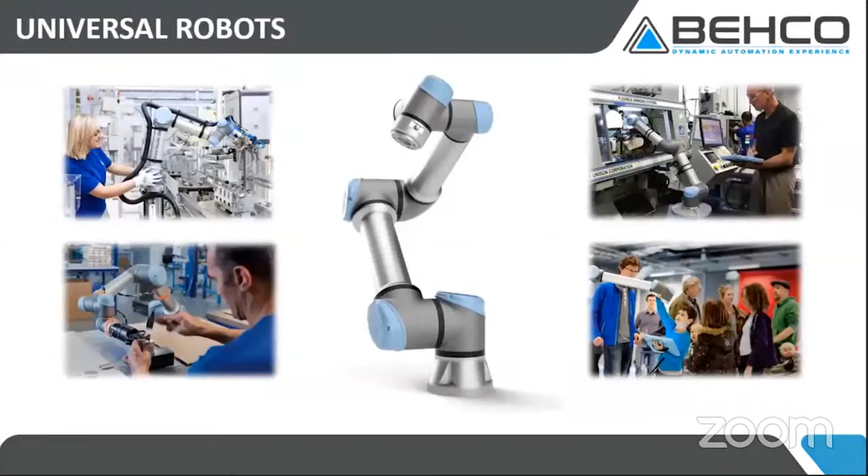We've been a Universal Robots distributor since day one in 2013. To our good fortune, we work with the best collaborative robot in the world. We've seen this emerge from the start as a tool that enables our customers and users to be able to take hold of a robust 6-axis tool and learn how to teach it simply to do tasks that are important to their business. That's why this has been so successful in the market.

In order to solve problems for customers, we have aligned ourselves with a fantastic group of technology providers to the market, whether it's software products, 3D vision, mounting, dressing, end-of-arm tooling, vision products. We can handle soup to nuts activity for a customer looking to do pick and place or machine tending activity, providing support around programming if necessary to get you started.

I just want to talk again a little bit about the product that is coming to market. The checksum utility is going to be loaded into your UR robot as a URCap and then configured to allow for a safety PLC to query the robot and verify its safety setting. We think this is important because it's a standard feature in the industrial robot space, and it allows the risk assessment that in many cases has specific safety settings to be protected from unintended consequences from a poorly managed change.

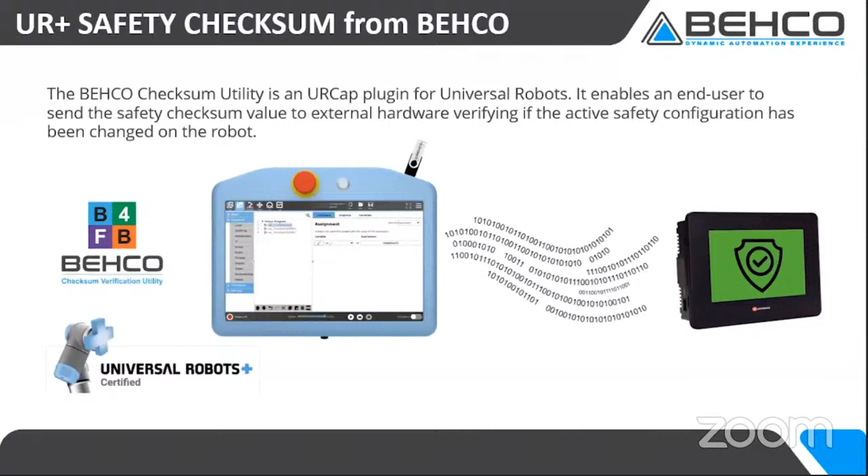This would sit on top of the robot software and ask the robot to verify that it has the correct safety setting. So to that end, we'll make sure that Roman will go into deep detail on how that's working for you. But we're very excited to be able now to present ourselves as a UR ecosystem.

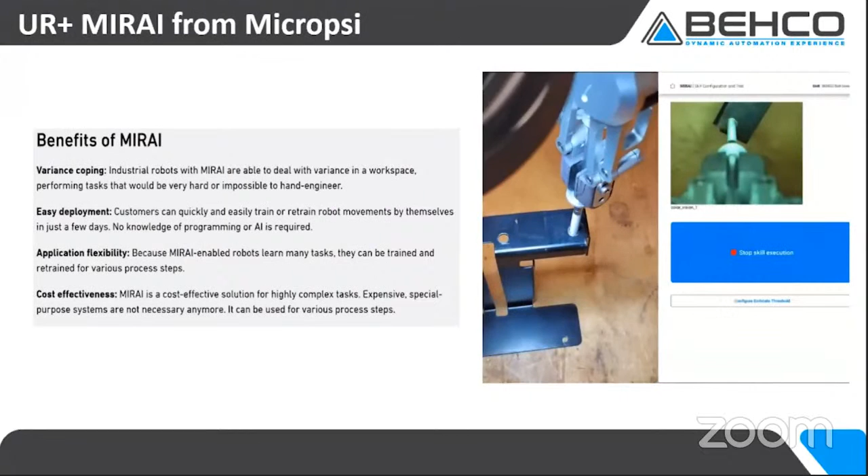The Mirai system is going to, I think, show what the future looks like in the robotic application space. Using the vision system tied with a force torque sensor, we're able to teach this system tasks which it's then able to accomplish regardless of the fixturing of the part. It will find the location. So giving it hand-eye coordination and adapting to the real-world challenges of manufacturing tolerance, we see this as a breakthrough technology to study and see where it can take us.

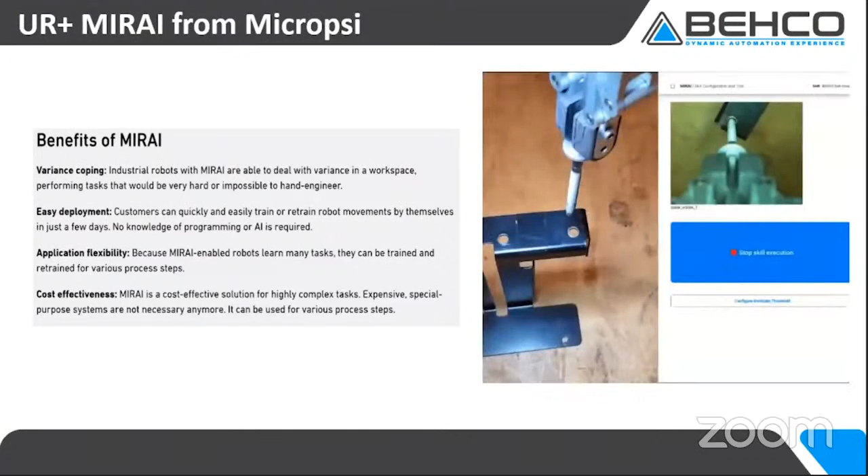We think this is a great alternative to the scanners that are being used, especially in any high traffic areas. And certainly with a light touch that Caleb will show later, you can see yourself working next to the robot and not feeling the same level of concern with even a force limited stop.

And then last of our technologies is the Canon 3D bin picking. This has been presented at previous tech takeovers. I think what's important to show here is that there are different sizes based on different parts. We're seeing this emerge again as a leading technology for companies that are looking for an enterprise solution. It can handle a vast variety of part conditions, and with the different options, it can overcome obstacles that would traditionally make the technology not usable.

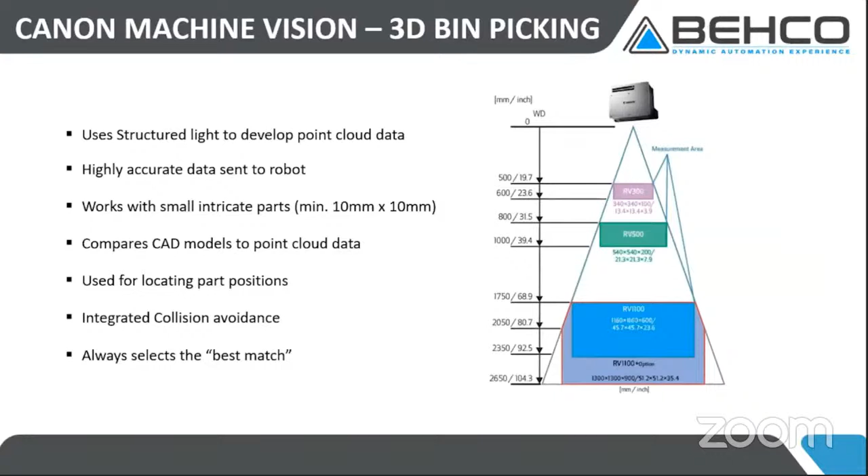So to that end, we're excited to show this demo now where we can do work for you and feasibility studies to prove out whether you've got the right parts for this technology.

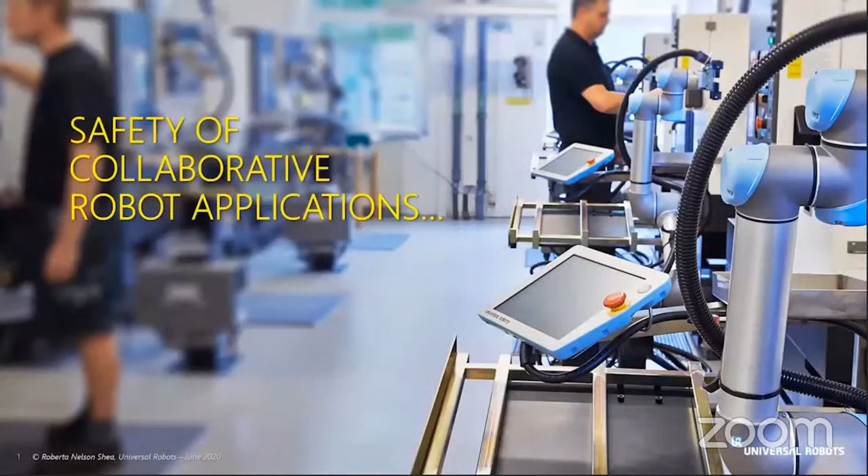Well, welcome everyone. I'm here to talk a bit about safety in robots because that's what I do. You'll get to all the exciting features that will be shown by the other speakers as far as how to make use of the robot, but I talk about how to make use of our robots and ensure safety of personnel.

So just what is a collaborative robot? And this is sometimes called a cobot. After all, Universal Robots likes to say, we are cobots. We started it. We're the leaders in the world, and that is obviously a talking point of great pride.

But really this term started at, if you can believe it, a boring safety standards meeting in which we were talking about risk. And philosophically, the discussion came to, well, if a robot were to contact a person and the person is not hurt, why not allow the contact? But what we all have to understand is that this is not simply about the robot, it's about the application. So what we're talking about is an application where purposely designed robot systems work in direct cooperation with a human in a defined workspace.

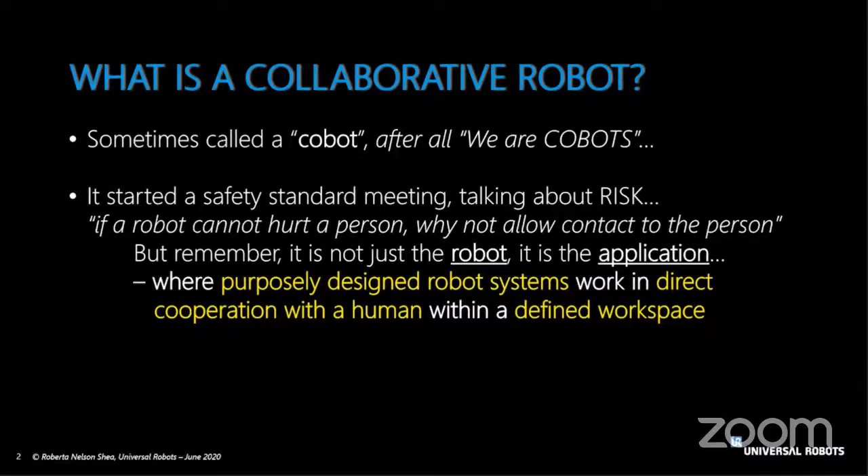So collaborative robotics is not, I bought a collaborative robot that's safe, I don't have to do anything. I don't have to worry about risk assessment, guards, safety fences, cageless robots, yay, whippy. But that is wrong. That is a mistaken idea. The issue about safety is safety of the robot application.

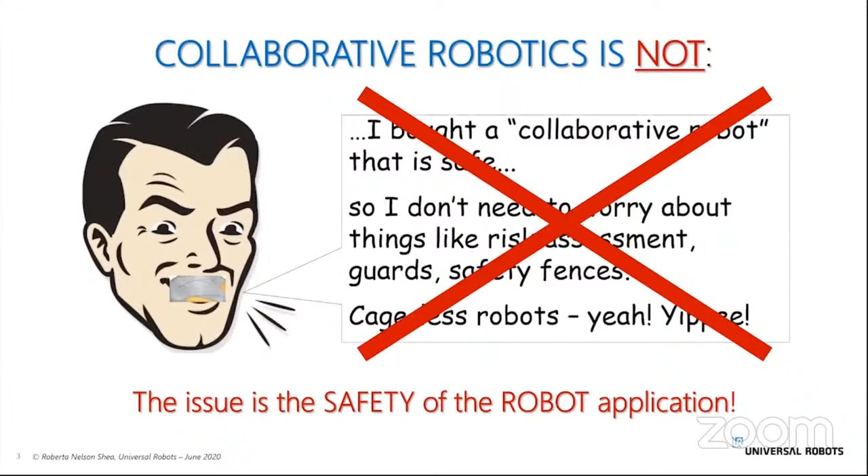So collaborative robots, officially from a standards viewpoint, there is no such thing as a collaborative robot or a cobot. Now I'm saying that simply from a safety standpoint and safety standardization. But we still have all sorts of statistics and PR about collaborative robots and cobots. And if you think it's not an official term, but there's statistics, well, I guess that tells you the magic of marketing. So these terms really are marketing terms. They're not what's talked about in a standard.

But what is talked about in a standard and what's talked about as far as expectations are that a cobot is a robot designed to be able to work side by side with a person, meaning be usable in collaborative applications. That it's easy to use, easy to deploy, easy to get a very quick ROI, and to hopefully open up opportunities for productivity that did not exist previously.

So what we get involved in is more or less automating the dull and dirty. The payloads of our robots go up to just under 20 kilos. And so we're not talking about the 1,000, 2,000 kilo robots lifting and moving whole car bodies. We're talking about smaller robots and applications that more often than not, the application is dirty. It could be dull. It could also be quite lacking in ergonomics. And so therefore there's ergonomic hazard. So this is a good thing.

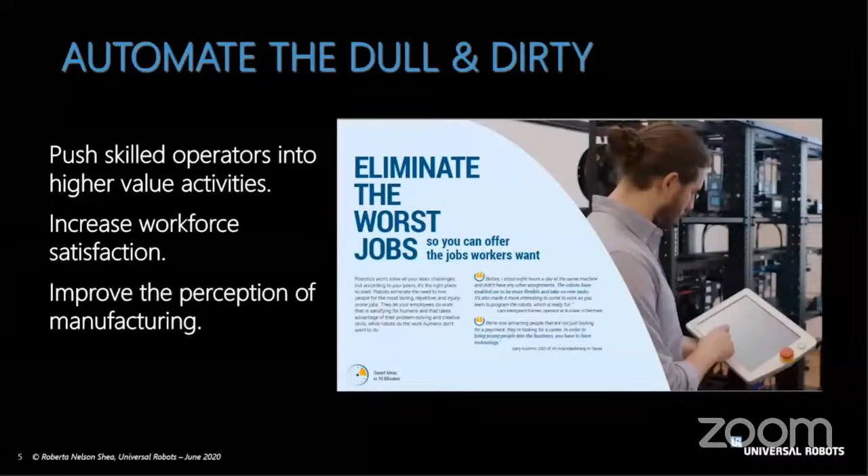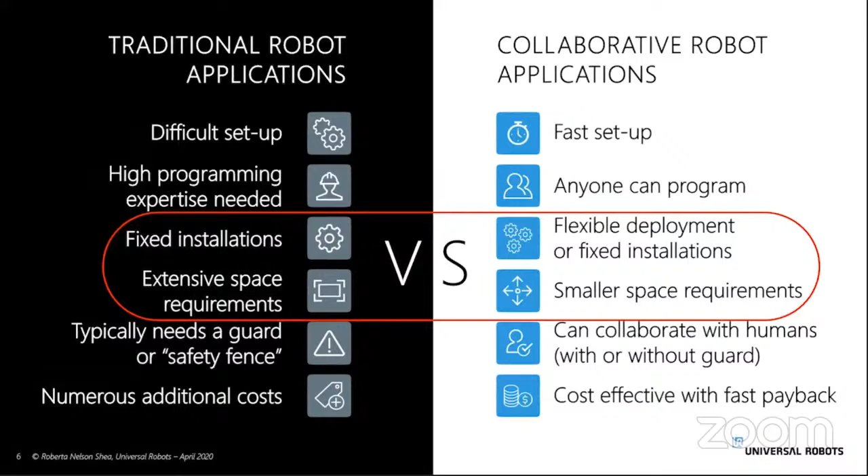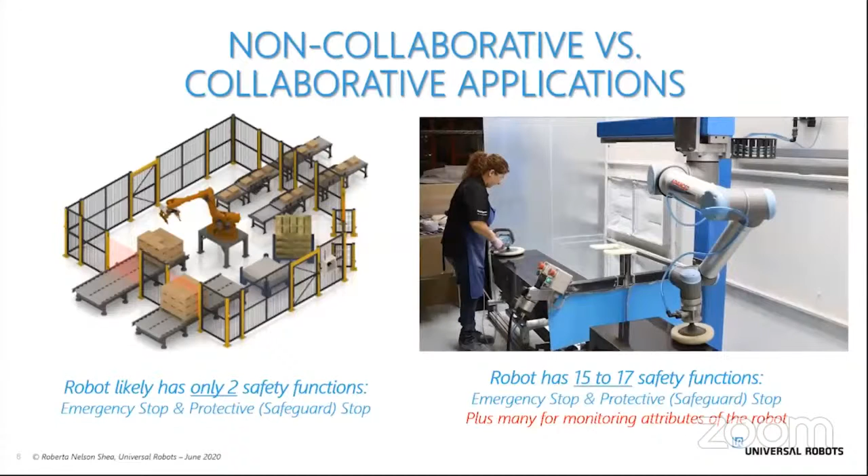So those are some of the rather typical things to point out as being differences. Okay, for that non-collaborative application where we separated, the thing that everybody has to understand is that there is a concept called restricted space, and that's the space that the robot application operates within and cannot escape from. I know that sounds like a funny thing to say, but you can program a robot to many, many different motions, and unless the movement is restricted, it goes exactly as far as it can.

So one of the first things people are advised to do is, once you know your application, limit the space that the robot can operate within, because that makes your job simpler for trying to make your application safe. So in these traditional applications, we kept everybody separated and people away. So again, this whole concept of the robot operates in one area and people operate in another. Well, we don't have that when we talk about collaboration.

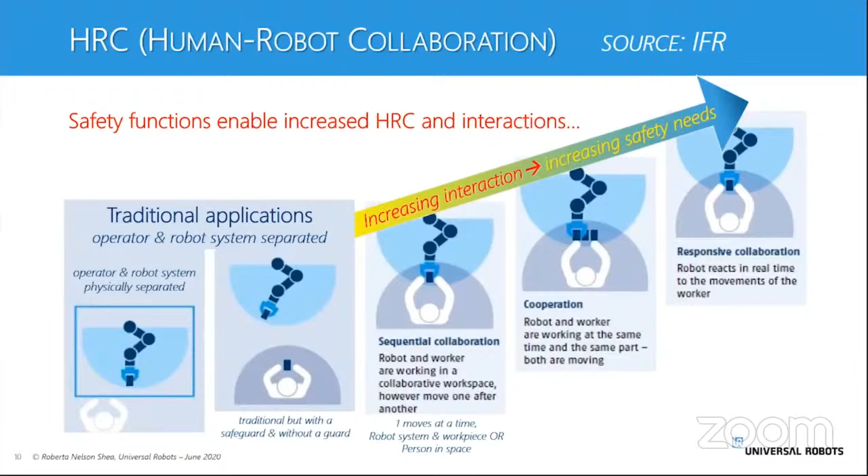And then we really are still in the same situation in the box immediately to its right, which would be what we see quite often with light curtains or safety scanners. And then once we remove these safeguarding means that separate people, we have interaction, whether or not it's one at a time, same time, or highly interactive. Those are really all about the same thing. It's just how do you provide for safety? So how do we do that? We do that by safety functions that get described in safety standards, and they're described within the user manuals and the literature provided by robot manufacturers.

So the standards part of all this, that's really what I love, because that's the part that I find to be the most fascinating. And yes, I know that's probably a bit strange, but that's me.

Okay, we have lots of safety standards, but fortunately in the world of robots, we have a very wonderful global situation in which the international standard is based off of the US's national standard, and the international standard has, over a period of time, marched forward. It has been adopted in Europe. It's an EN ISO standard and harmonized under the Machinery Directive. We also took that ISO standard and adopted it as the current revision of ANSI RIA R15.06. There's no deviations, no changes from the international. Canada has done the same. Canada does have a couple of very minor deviations.

And as well, Japan, Korea, Australia, and more countries have adopted the ISO standards as their national standards, either directly keeping the same nomenclature, meaning saying it's ISO 10218-1 or -2, or under their own name, like what the US did with the ANSI RIA R15.06, but that's a wrapper around the international. So we have this wonderful situation of the same standard really required around the world. I'm not aware of another machine that is used around the world having this wonderful distinction.

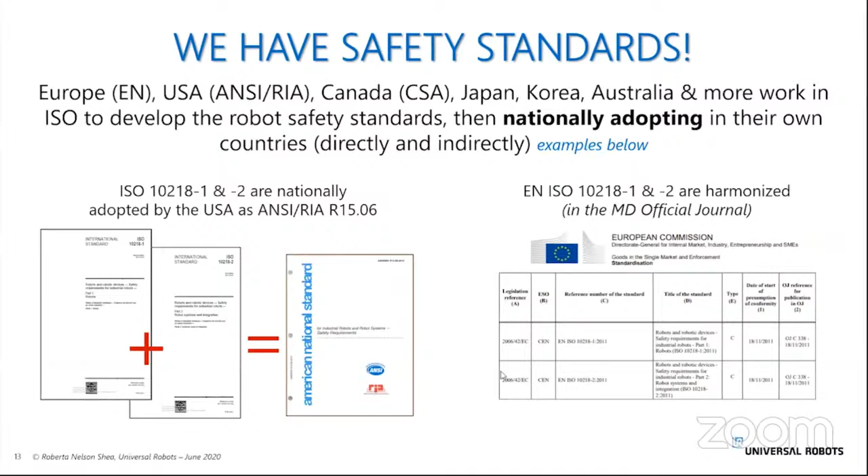So how can you be sure that whatever you're getting is safe? Meaning you buy a robot and you say, how do I know that it actually meets the standard? Generally speaking, robot manufacturers do seek third-party certification. It is not a requirement to have third-party certification of robots, but most robot manufacturers do so because that is a way to provide, if you want to say, that safety net or comfort to the marketplace of, I say we do what we're supposed to do. I say we comply, but here an independent agency has reviewed everything and they say we comply.

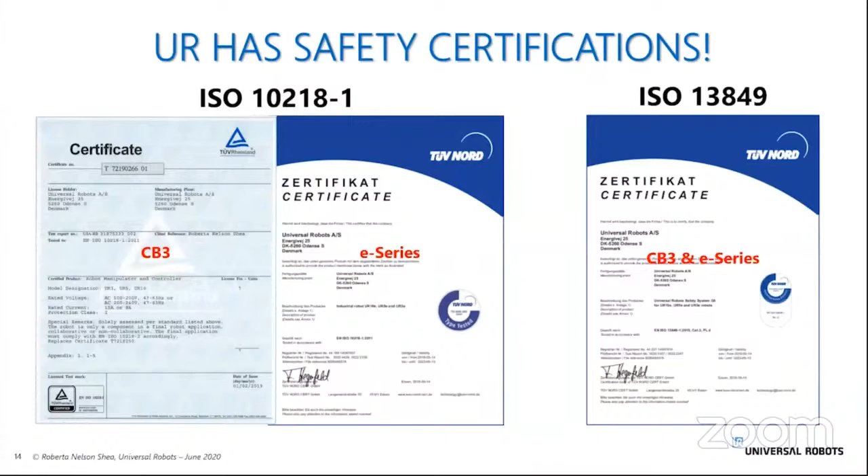So that is also the case with Universal Robots products for both our CB3 series and our E series robots. So we provide a lot of functional safety information. And I can tell you that I have yet to see any other manufacturer provide as complete information and as useful information. Because keep in mind, our robots then get paired with an end effector. We don't know which one. They can be used with many. We don't know exactly what the application is. You're going to see examples of various applications shown today, but there's many more. And they're used for picking and placing, assembly, inspection, sealants, welding, all sorts of things.

So that integrator who puts it together into the application, whether it's a third party, whether it's your distributor, whether it is the end user themselves, that third party has to make it all work. We make sure we provide the information you need in order to enable an application to be put together and comply with safety requirements.

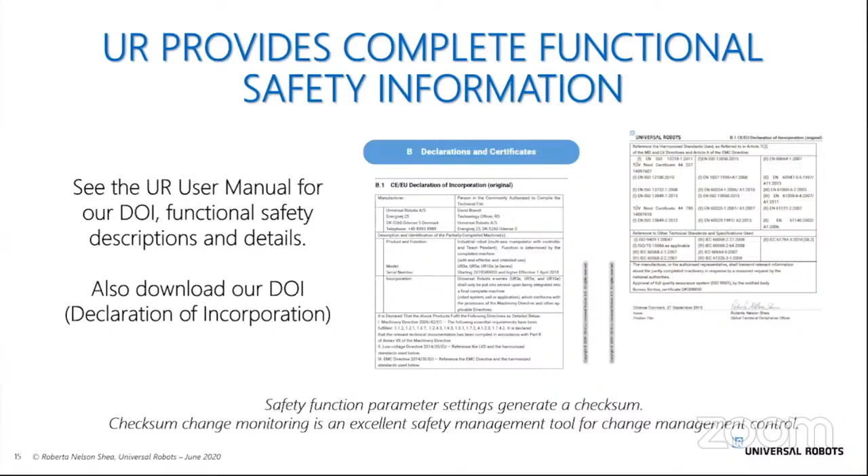So we do provide a declaration of incorporation. That is something required for Europe, but it has the unique benefit of detailing in a summary form just what does the product comply with and how are you assured that it is complying with things. In addition to that, there's a complete table of safety functions and descriptions of how they work, triggering events, outcomes, dependencies, and so forth. So you get it all, as well as our PFHd values and everything else.

It's important to understand safety function parameter settings, because for almost all the safety functions, you have a parameter that can be set. Let's say it's an axis limit or a joint limit or a joint speed. Let's say it's speed of the TCP. Let's say it's power or a force setting. And each of these are parameter settings for your particular application. And those settings generate a checksum.

And you're going to hear today about a utility at a remote computer, if you like, that can be monitoring the checksum and monitor whether or not it has remained the same as what's in the library as having been the proper checksum, or if it's been changed. If it's been changed, there's been a change to the robot safety settings. This may be perfectly valid and it just wasn't properly documented, or this could be an unauthorized change. So this is a great tool to have for safety management and change management control.

So which part of these ISO standards applies to me? And I'm saying me, trying to put my hat on for each and every person in the audience. If you're a robot manufacturer, part 1 applies to you. If you are an integrator or end user, part 2 applies to you, because part 1 is about the robot itself. Part 2 is about the robot system and the robot application. And it talks about putting everything together in the requirements.

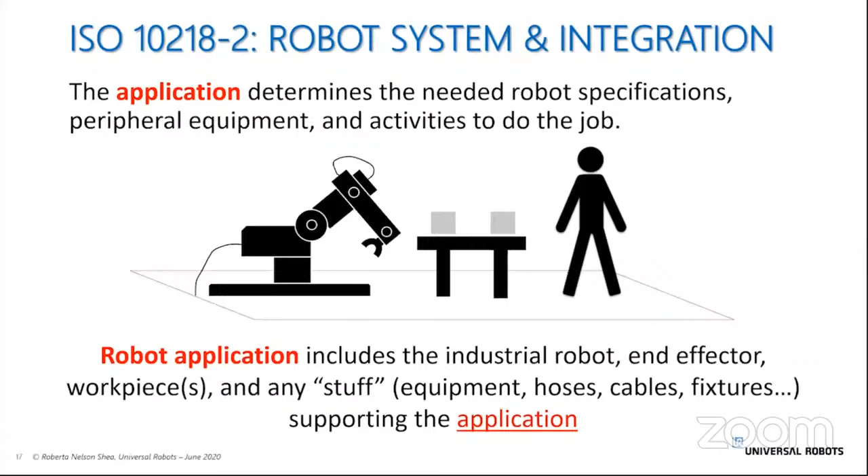Well, in addition to those 2 robot safety standards, 1 for the robot manufacturer and 2 for the integrator, there is also something called ISO TS 15066, and that means ISO technical specification. Now, a technical specification is not quite the same as a standard. If you want to think about it in the order of priority or importance, a standard is number 1. Technical specification is number 2. A technical report is number 3. A white paper number 4.

And as you go up the chain towards a standard, you are going up the chain towards having a better grasp on what are the issues. So the notion of collaborative robots, collaborative applications was quite new when it came out in the 2011 safety standard. So this technical specification was written to try to provide some more guidance and shape around how to do it.

So the technical specification means that it includes requirements. It can make normative requirements, but it cannot disagree with the standard that it supports. So this particular technical specification gets used along with part 1 and part 2. As just an FYI, this particular technical specification was adopted as a RIA, Robotic Industries Association technical report, and I have it listed here. So while it's a technical report in the US, it is a technical specification internationally.

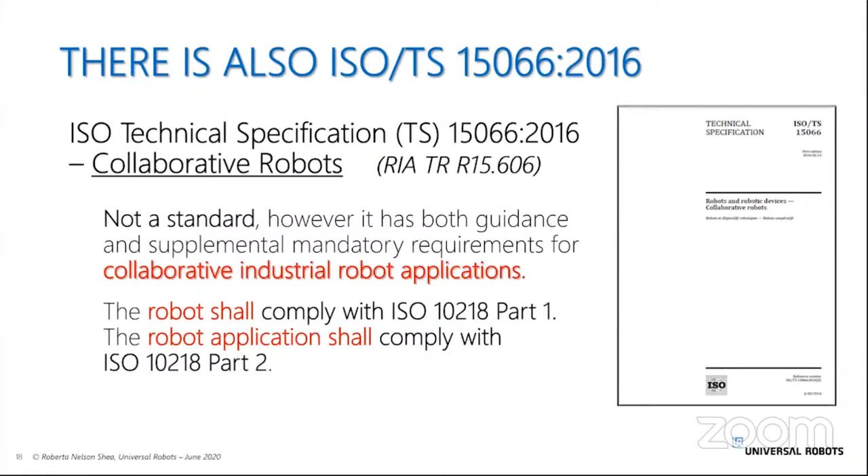The reason it is not a technical specification in the US is that ANSI has no allowance for this sort of document. It's either a standard or a technical report, hence it being a technical report. Right now, all of 10218 is under revision. It's not going to be out for a couple of years, but part of the revision is to incorporate the materials that are in 15066 directly into the Part 1 and Part 2 documents.

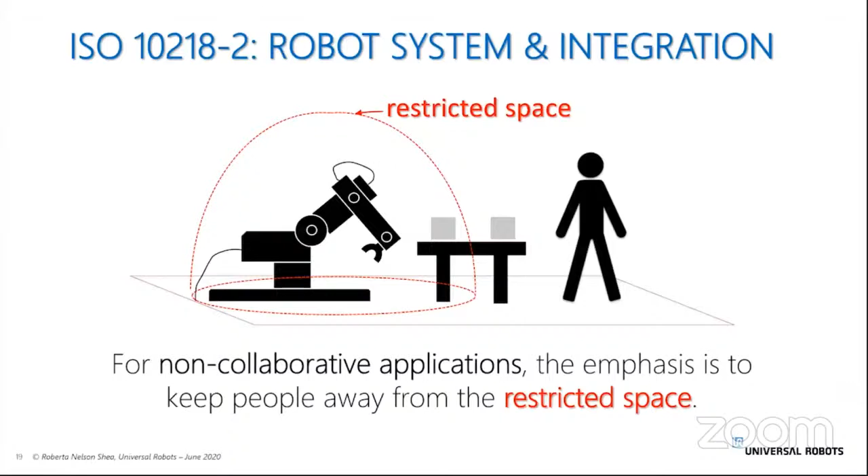Okay, I mentioned the restricted space. So in non-collaborative application, the emphasis is to keep people away from the restricted space. But we don't do that with a collaborative application. Instead, we have to ask the question, how do we protect workers? Well, we have to follow the standards, the technical specification, technical reports, and there are technical reports that are specific to robot applications. So what's the challenge of doing this? And it's going to sound maybe a little flippant, but the challenge is reading and comprehension. And all I've got to say is don't give up.

First thing you want to remember is if you are planning to get a better understanding of a standard, read it cover to cover. Do not whip out the highlighter at the first page and pick things to highlight. That is not the intent. The standard is cohesive and it self-references within itself as well as to other documents. The most important thing is to understand the scope of the standard, what it's intending to cover, and what it does cover, and then to read it cover to cover. Give yourself a little soak time, then go back.

A standard is not to be used where you do a word search and only look up the word you're interested in, because you will lose meaning and you will lose a fullness of understanding. So it's reading and comprehension. So just don't give up. That's all I ask. It does take a little bit, but you can get beyond it. And I can tell you personally, I've had some standards that I've really been challenged to read and even like initially. I had one, I kept printing it and start reading it and I'd throw it out. And I would probably do that about once a month. It took me a year to get through it. So it is possible.

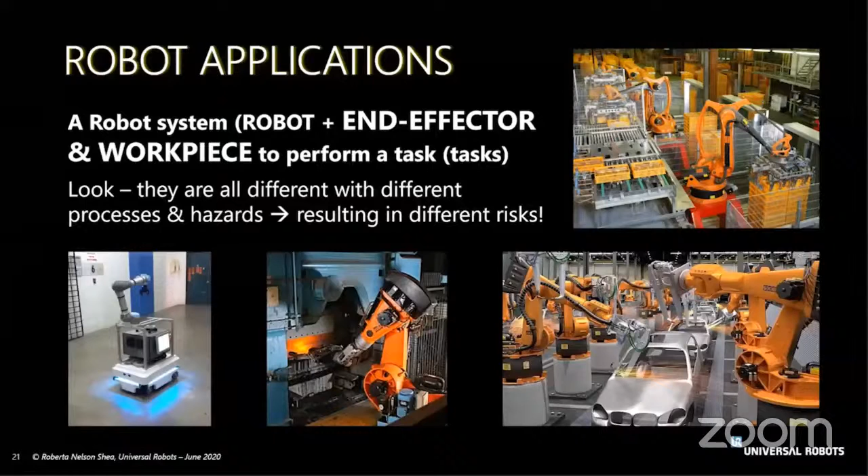Are there thermal risks? Are there any sort of laser or welding risks? All of this means that the risks are different, the risk assessment will be different. So because it is about the application, the questions that have to be asked when doing a risk assessment are: can the robot injure a worker? Can the end effector injure a worker? More often than not, the end effector and/or the workpiece is the most dangerous part about that application, and not so much the robot.

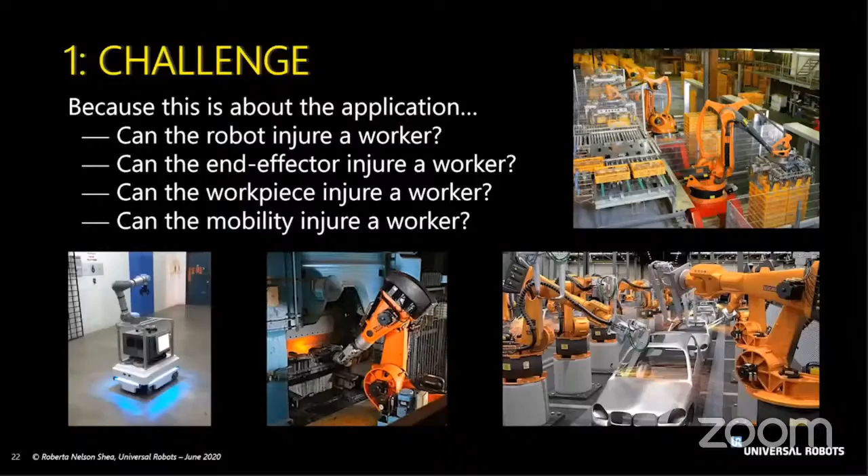Can mobility injure the worker? In the case in the very bottom left, as it's whipping around through the facility, is mobility the greatest risk? And if so, what are you doing to protect people from those risks? That could be as simple as safeguarding devices that will slow down that mobile platform, for example. So risks can be obvious, sharp edges, pointy things, but not always obvious. The risk assessment process reveals all the hazards, not just the easy to identify sharp edges and pointy things.

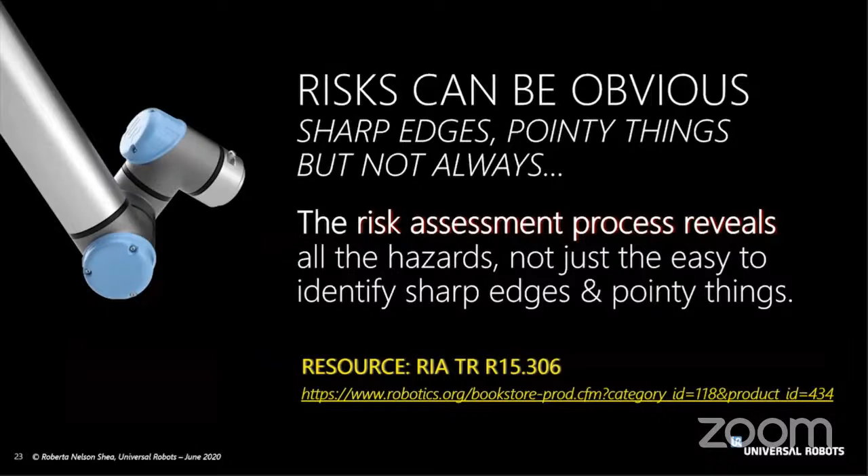And to that end, there is a resource available, and I have included the link here, from RIA, which is a risk assessment methodology. It really steps you through everything. And what I do need to point out is that risk assessment is scary if you've never done it before. Each time you do it, it becomes easier and easier, and all it takes is a few under your belt, and you say, risk assessment, I got this. I know how to do it. I feel comfortable. The most important thing is do it, be consistent, and be thorough, but don't be paralyzed about doing it or not doing it.

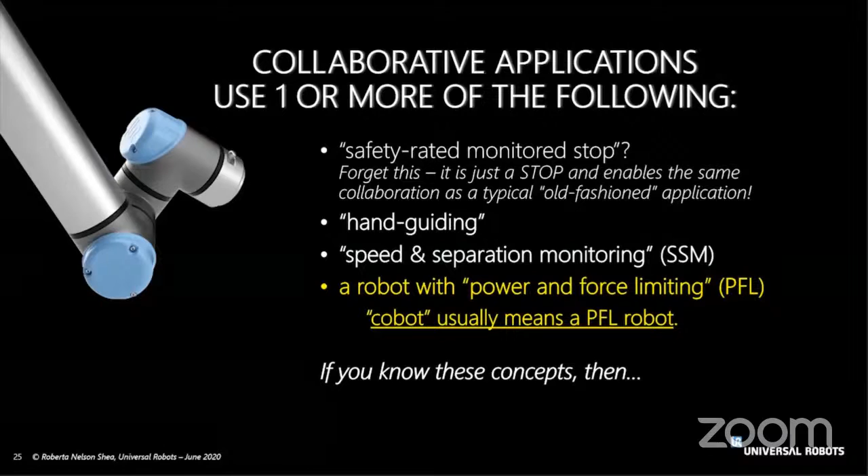So you've done your initial risk assessment. Now what? You need to design and implement your collaborative application. So we've got a few different techniques, and if you know these concepts, that's great. The world that we tend to play in, meaning as Universal Robots, is the bottom one that's in highlighted color, a robot with power and force limiting. And it tends to get used just as that for interactions, or sometimes combined with speed and separation monitoring. So remember I said it can be overwhelming to do the risk assessment, but don't be overwhelmed. The whole notion of the risk assessment, if it's a power and force limited application, is just an added step. And you can get through all this.

But let's say you're not prepared to expand your risk assessment. You don't have to do that. You can do speed and separation monitoring with our robot. If you are ready for it, there is another RIA resource for how to check to make sure you're not exceeding limits, and that's for power and force measurements. So you've got all of these things. And you also are going to have a presentation by Airskin, which would be another technique that could be used. And it could be used as a nice start to doing your collaborative applications and starting very simply.

Very good content. Thank you for queuing up some of the other technologies that we're going to present and giving us a thorough understanding of the demands for the application space, and also giving us more confidence that although the demands are real, they're manageable if we put the effort into it. So I think at this point we're ready to go to Roman.

Hello and welcome. I'm extremely proud today to show off the checksum verification utility from BEHCO. It is a utility that we developed with a Tier 1 automotive manufacturing company. Through a few development processes, we were able to communicate over all the major communication interfaces that the Universal Robots have. And it was a great learning process, and it ended up being a project that I was extremely proud to present and show off on the UR Plus website.

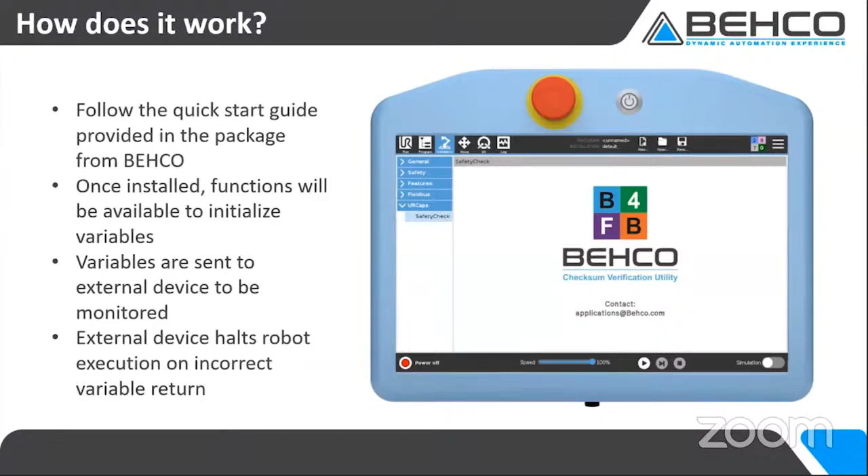And in the end, we came up with these three functions, one of which was a string variable, and the other two are integers. This allows you to communicate over Modbus, Profinet, and Ethernet IP. So in some specific instances, the PLC may not take a string variable, and that's when you'd use the other two variables and combine them together to get your checksum value.

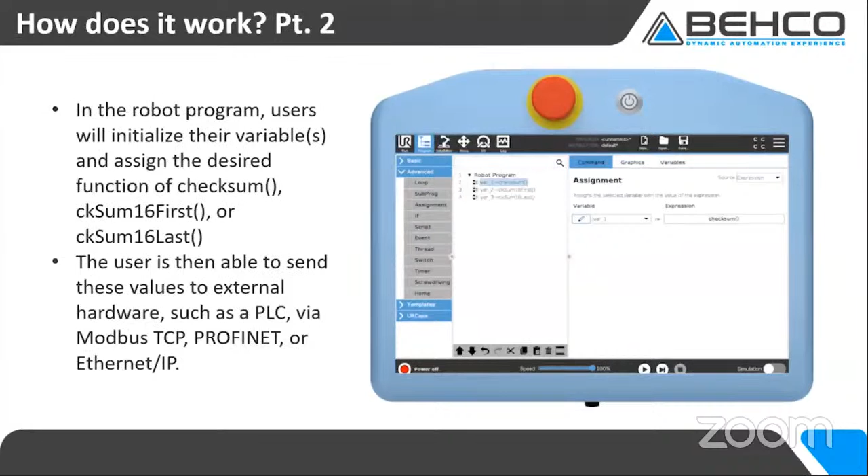BEHCO checksum verification utility, as I said, is now available on the website. And I'm extremely proud to present it, and that's really the whole gist of the utility.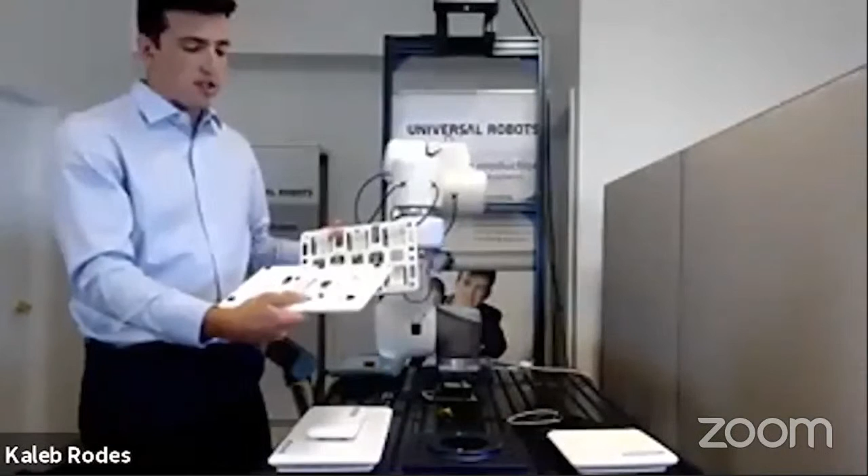The brackets on the back side here are 3D printed. They allow you to connect it to a flat surface, so aluminum extrusion or some other type of material. Then simply the pad is magnetically connected to the bracket to complete your system. The second product is what you see here on the robot, which is, again, these 3D printed brackets, but they're customized to the specific joint dimensions and the lengths of the arms to give that robot kind of an exoskeleton that wraps around the robot's profile.

The robot's products for AIRSKIN: there is Universal Robots, obviously, KUKA, Denso, Mitsubishi, Staubli. They're working on a few others like Fanuc and Yaskawa that are to come out later in the future. The installation time for this specific unit on the UR10 was about 30 minutes. Now that I've done it once or twice, I can probably do it in about 20, so you get faster as you go.

The last product here is the safety flange, which is mounted directly between your robot tool bracket and your end of arm tooling. So it's this white pad you see here, which acts just like any other of the pads. The only difference is inside of this pad is a spring. There's 3 different springs based on the amount of payload you have on the end of the robot. The first spring is between 0 and 2 kilograms. The next spring is about between 2 and 10, and then the third spring is 10 and higher. So they have different spring constants for different payloads on the robot.

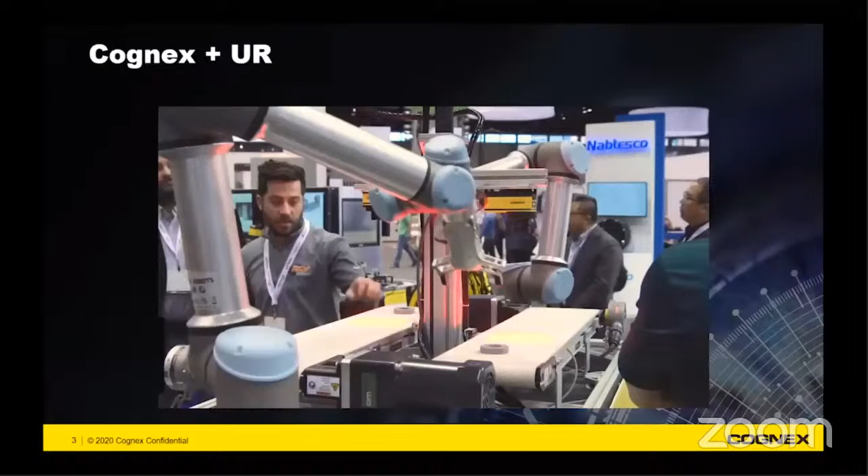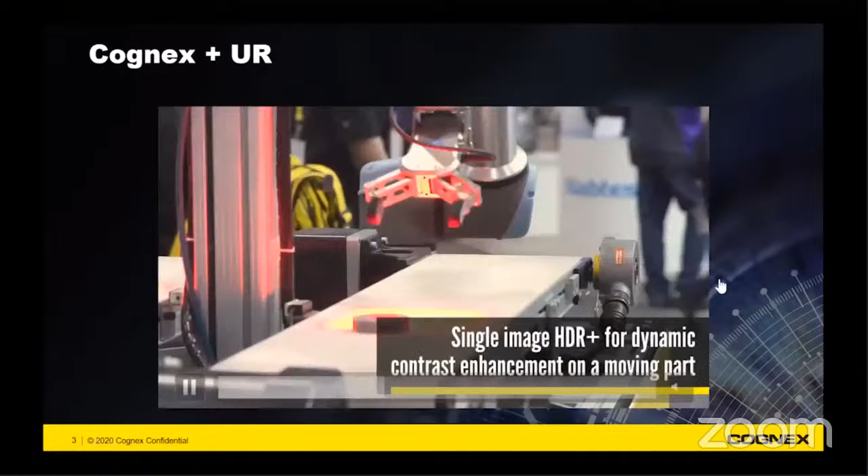About a year ago, Cognex actually developed UR caps, which essentially enabled Cognex and UR to seamlessly integrate with each other. Typically, with any robotic applications with machine vision, it's fairly difficult to communicate between the robot with the cameras and to calibrate to essentially find any parts in any type of movement applications.

Looks like the video is pausing here.

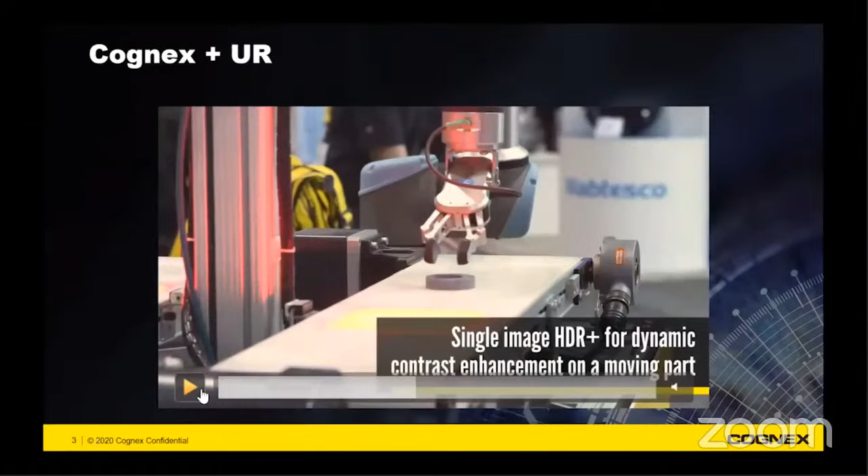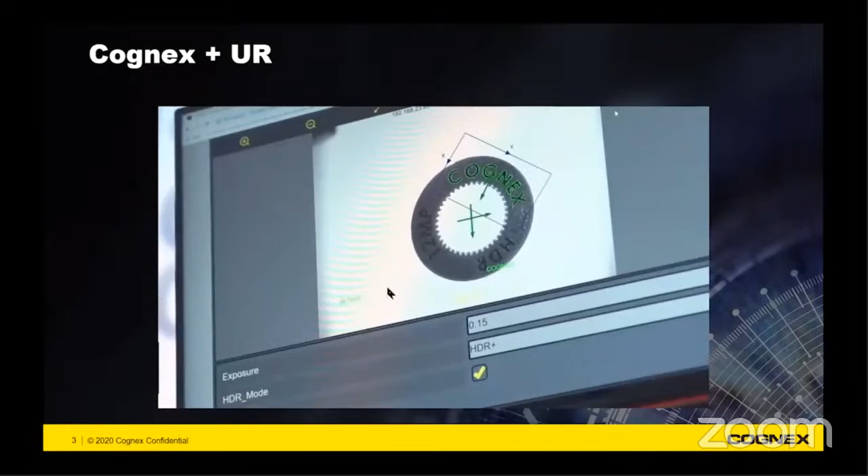So essentially here, you can see that we're fixturing off of this part, we're locating it and essentially sending those coordinates to the UR robot to do any type of pick and place applications. With all of our Cognex systems, they are smart vision systems, which means you don't need a controller or a PC to process any of the equipment or any of the communication protocols. We can actually develop your program and send that data directly to a PLC or UR robot.

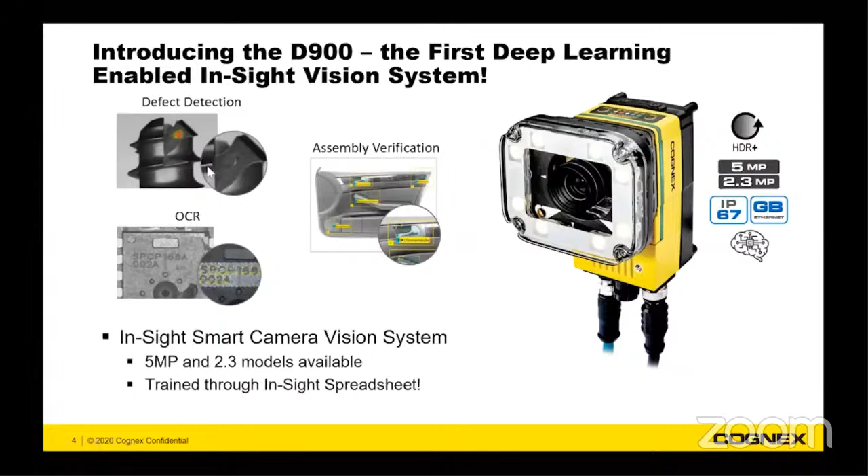So the next part of the presentation, I'll actually be going over our first ever deep learning enabled In-Sight vision system. Similar to the other Cognex systems, this is a standalone system, meaning that all the processing is done on the Cognex camera here. I'll be going over some of the applications that require deep learning, some of the applications we can handle, and then going over the features of it. And at the end, I'll be going over a live demo of this.

Some of the features of the system: we do have about 15 gigabytes of storage memory, and the reason why that is important is because when using an AI technology, you essentially need to train images and save images to your database and to your program. Having a lot of storage memory is very important so you can save those images with the job program so you can be online. This is IP67 rated, meaning that it is rugged and meant for the factory floor.

We do have a wraparound pass-fail indicator, so operators can see if you're passing or failing the job without even going to the system. We do use 24-volt power I/O and Ethernet communication. We also have a third-party light port, so if you want to trigger and use external lighting, you can actually program that directly from the camera and power it as well. This does come with Cognex ViDi, which is our deep learning algorithm, and it also includes HDR.

For those of you who don't know what HDR means, it stands for high dynamic range. Maybe if you're streaming a movie, you might see a little HDR symbol at the top right of your screen. Essentially, this enhances the contrast of your image or of your video quality. And why that's important in machine vision is you want to get high contrast in your part, and I'll show you why that's important in order to do any machine vision tools for that matter.

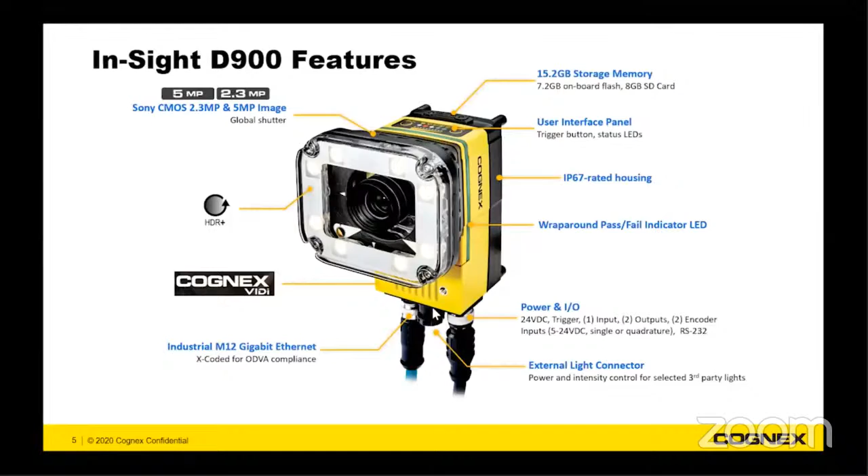So the first application that we typically look at for some of these deep learning algorithms is our defect detection tool. Now, for those of you who have experience with machine vision systems, typically looking at applications like porosity or surface defects, such as scratches and dings, it's very difficult to program these in because not every scratch is going to look the same. They're not going to be in the same location of the part.

So it's very difficult to train and program a system like that, especially when you have confusing backgrounds like this screw. However, using deep learning, we're essentially training on a subset of good images, or what the quality person considers good. And by finding any anomalies in the image, our ViDi detection algorithm will find those anomalies and classify that as a defect.

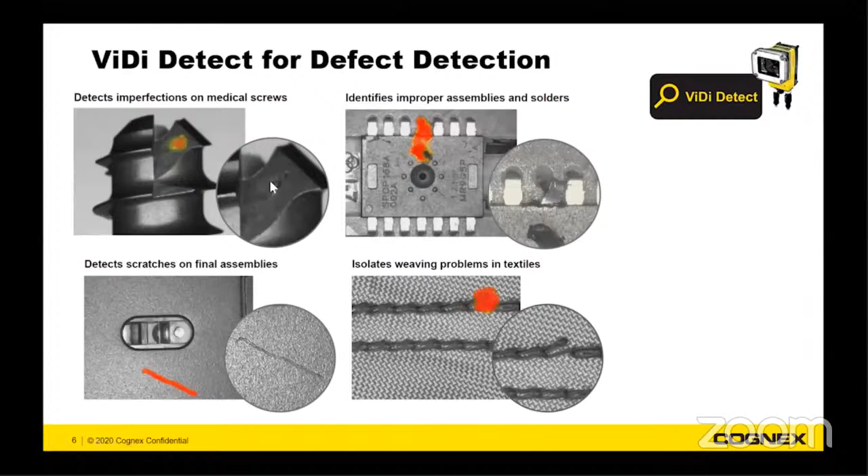The next is our ViDi check for assembly verification. This is to make sure that all the components,

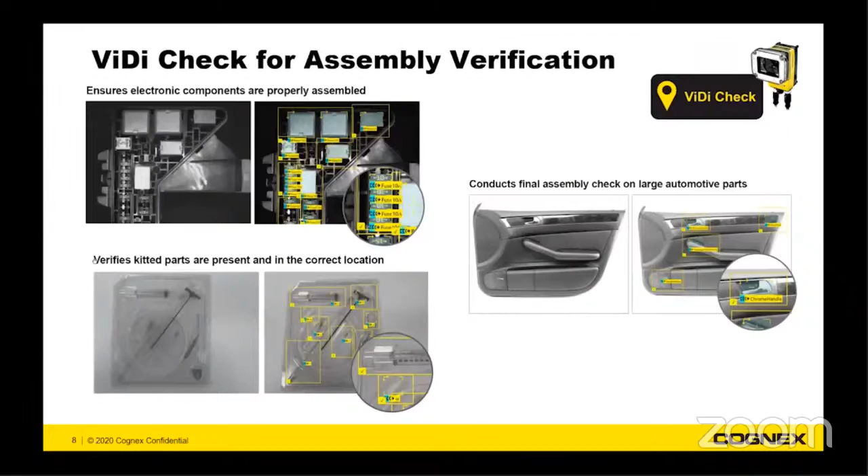So the last part of this is I'm going to actually do a live demonstration with the deep learning system. So obviously I'm not able to give this presentation in person, but this is the setup I have. I have my In-Sight D900 system here, where I have a red integrated light and autofocus lens. So as you see the live feed, you might see some red lights flashing. That's the reason for that. I also have a webcam here just to show what I'm putting under the system. That way you guys know I'm not pulling any tricks on you guys.

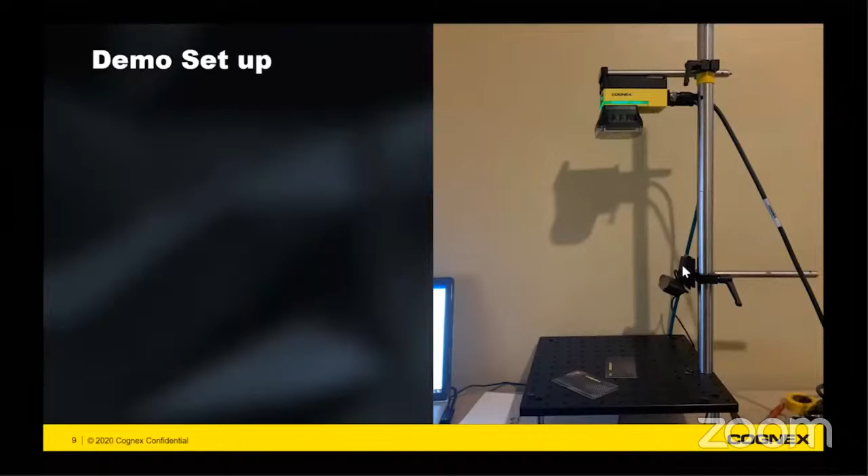I have this connected directly to my laptop. You have an Ethernet cable basically coming into here. And then I also have my development dongle, which is needed to train all of my images.

Now, the application I'm going to solve here is I have 4 different weave carbon fiber cards. So you can see that the weave style is different as I go through my 4 different good cards, but I have some defects on the same weave styles. It might be a little difficult to tell because this is a fairly confusing background, but see, I have a little misthread right here on all these different cards. So with that, I am going to go into the live demo.

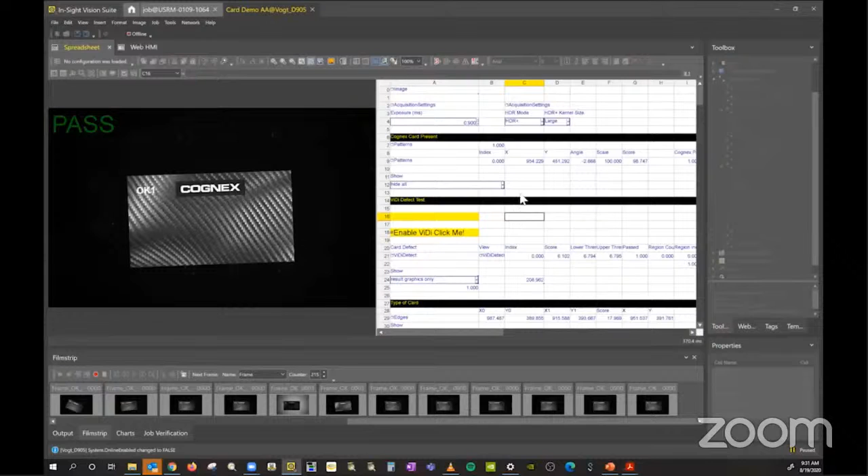So to give an overview of the actual program, for those who are familiar with Cognex, we're actually utilizing our spreadsheet environment to make any programs. We have our toolbox here where I can use our traditional machine vision tools as well as deep learning tools, and you can use them in conjunction with each other. So for this one, I'm actually going to train on this Cognex logo and use that as a fixturing tool. So as I rotate the part, it'll essentially move with it.

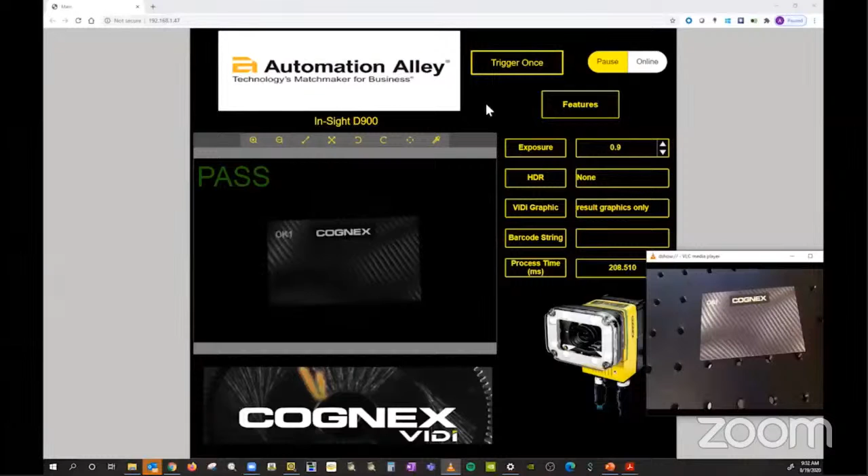Now with this system, we're also utilizing a web HMI interface. So with this, my URL is essentially just the IP address of my camera. And this allows me to make changes, look at the program and kind of see how the program's reacting. So you could do this on your phone as long as you're connected to the network, things of that nature.

Now, at first glance, this is a pretty low contrast image. I have a black card on a black background. So if I trigger, you'll see the lights flash. Pretty difficult to see a lot of those features. However, if I enable HDR, which is what I talked about earlier in enhancing the contrast, you can see I get a lot more of those features with this card. Now I can turn the system online where it's going to constantly trigger and you'll see that red flashing.

Now if I rotate this card, essentially we're passing, and this VIDI graphic where it's showing this red box is where I'm looking on this image, and it will move as I move this Cognex card. I can place, that was OK1. Here's a different weave style, which is OK3. I can move this card as well.

But what happens when I throw a defective card under it? You can see quickly as I put that under there, not only is VIDI locating where that defect is, but it's actually highlighting it as well. And if I hide this, you can see, that's that defect. And VIDI was able to identify that right away.

Let's say if I were to, I'll try to time this out well, draw a little mark on this card as well. I did that pretty quick, but you can see that I have a little mark there. And if I hide this, if I zoom in, that was that mark that I just made with that pen. And I'm processing all of this within about a fifth of a second here.

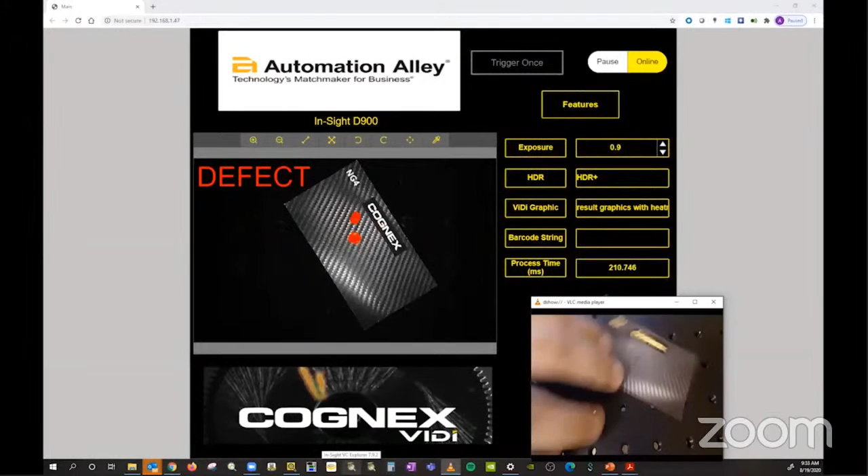I'll move this card around. You can see that it's continuing to find that. I get my hand out of the way, and then there's another one where I'm passing that good card as well.

And with that, we can also have some traditional tools with this. So, as well as doing our deep learning and finding those defects, we can also read any types of barcodes, do any pattern matching as well. So here I'm reading this code, outputting the contents of the string, and you essentially see that.

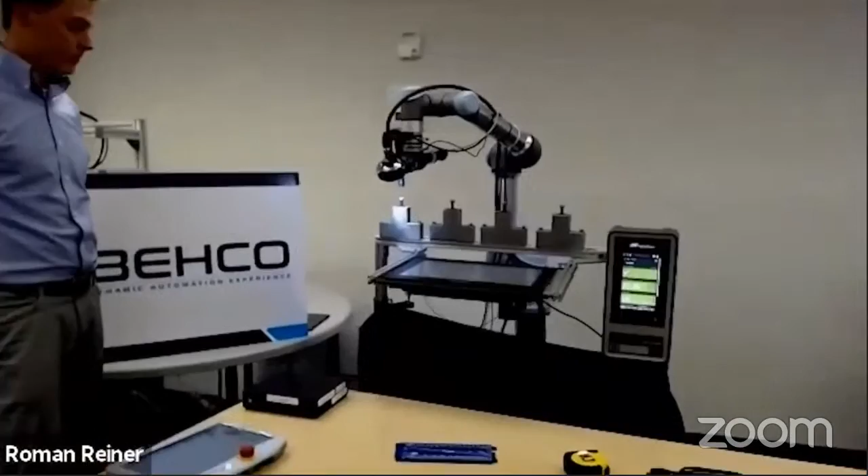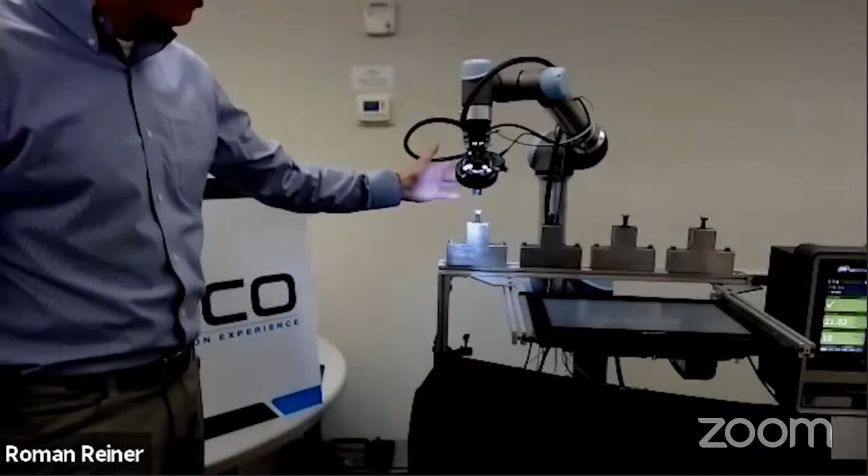So I'm going to talk as I go here. This first fixture is going to be stationary, and you'll see that I'll start at a reference point above the bolt and activate the MIRAI system. The MIRAI system will move to the top of the bolt and fasten it down. So I'll do that first. As you can see, it found the bolt, engaged, and now it's going to unscrew.

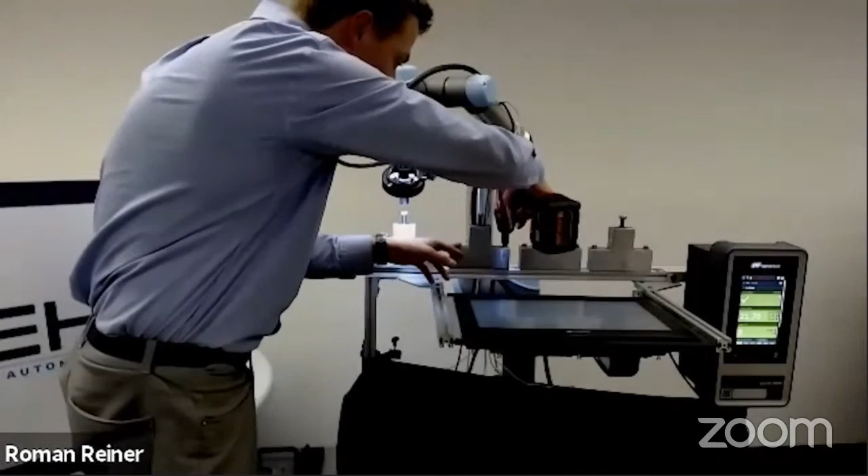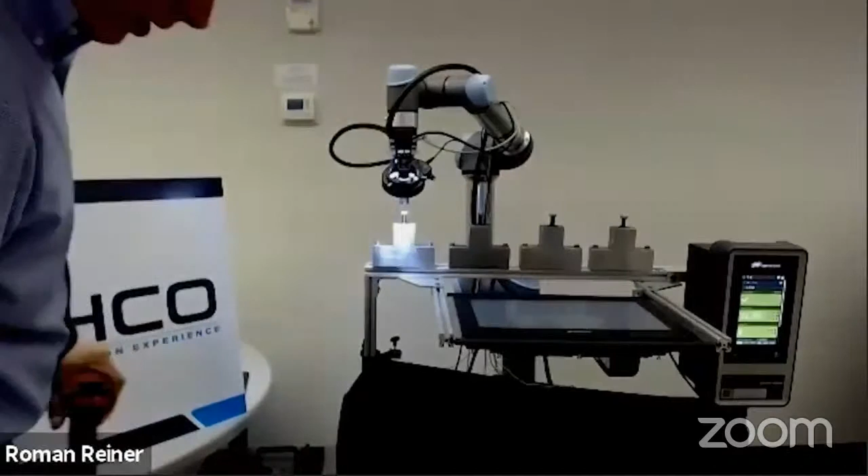And now for the other fixtures, I'll show a little bit of randomness to demonstrate that these aren't fixed locations. So I'll move them a little bit left and right here. Then I'm going to fasten them down. Sorry if it's a little loud. Continue on with the program. So you see I'll start at another reference point above this fixture, activate MirEye, and it's activated, skill complete, and it's torquing down the bolt.

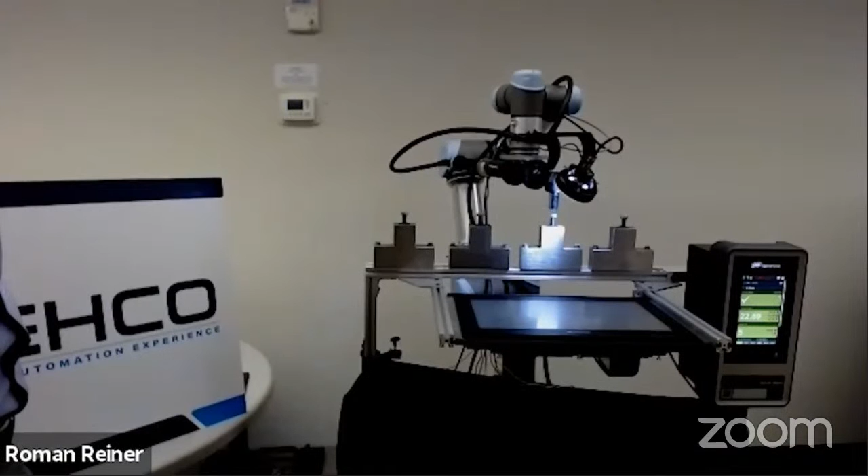I really like this technology, one, because I did most of the training on this fixture here and was just able to start from those reference points and activate MirEye without doing any other programming. It was all generic for the other fixtures. Really neat tool, uses machine learning to train through a Python server that communicates with this MirEye box here.

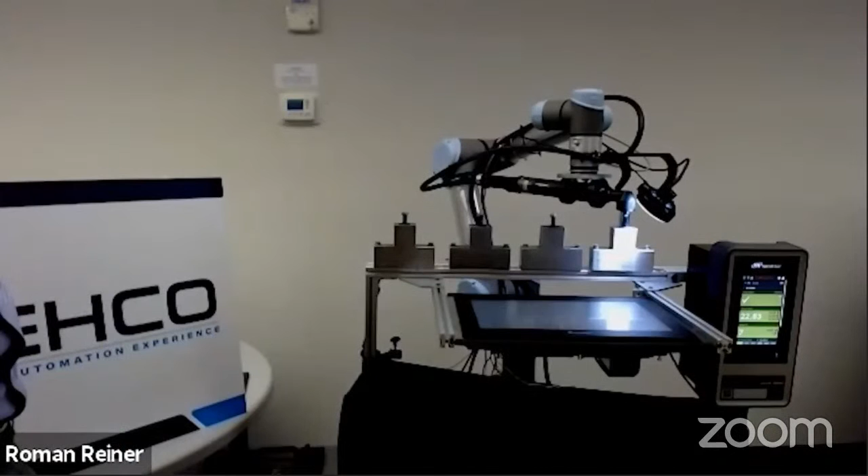And as you can see, it was successful in all those fixtures. It was a good demo. With that, I could go through it again and demonstrate it again here a little bit.

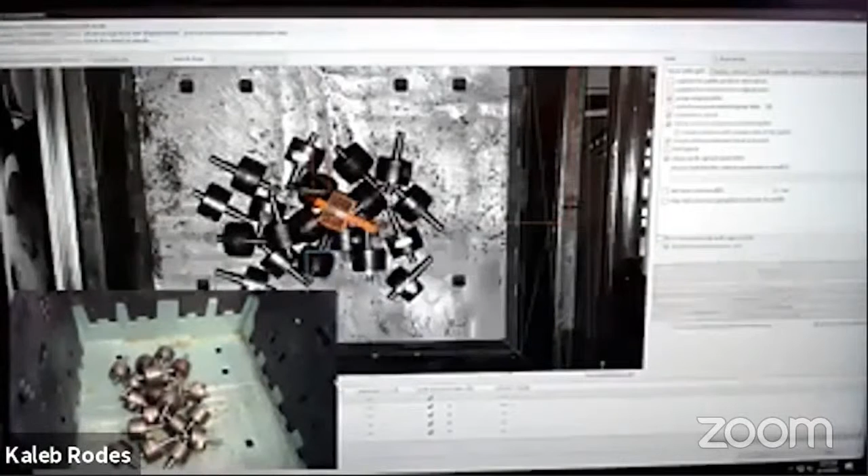For this final presentation, I'll be giving you a quick overview of the Canon RV bin picking demo. On your screen, you are seeing the Canon software along with the live feed of our bin of parts. So just a quick background on Canon and what they've done to come to market with this technology. So Canon, as you all know, has been in optics for decades with all your personal photography cameras.

As now more people are getting rid of their handheld cameras and moving more to iPhones or smartphones, Canon has taken the opportunity to move into a new channel and assigned 70 engineers in Japan the responsibility of creating a product for the industrial automation space. What they've come up with is what's called the RV machine vision series. And what that allows us to do is do 3D bin picking applications.

So a quick overview of the products. There are 3 products in the RV series. They are all the same dimension, so they all use the same vision head.

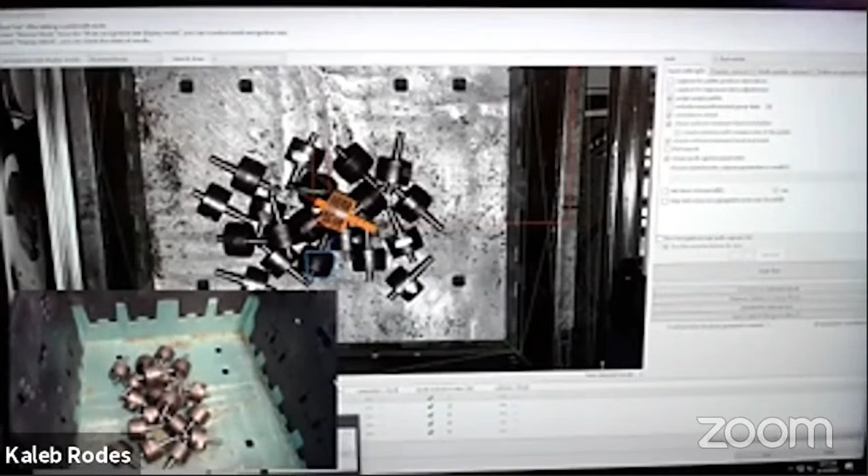The only thing different is the optics inside the vision head. There's 3 sizes: the RV300, the RV500, and the RV1100. Those are basically just field of views and what the distance is mounted above the bin. So the RV300 would be your smallest bin, smallest part size, and the RV1100 would be your largest bin, largest part size. Now, the Canon vision head is connected to an external PC, which is running the software you see here on the larger screen.

This is where all of the configuration and setup is completed, along with running a runtime window when the application is running. This external PC is then connected to your robot controller through TCP/IP socket communication. And then from there, the robot would be able to go into the bin and pick out the part precisely.

So just a quick setup of the software. There are 4 inputs into the system. The first one is your bin or your pallet. These are all CAD models that are entered in. For the pallet, you're able to enter in the dimensions rather than creating a CAD model. We'd recommend creating a CAD model if you had a more complex bin, something with irregular shapes other than a box or a rectangle. So that's the first input.

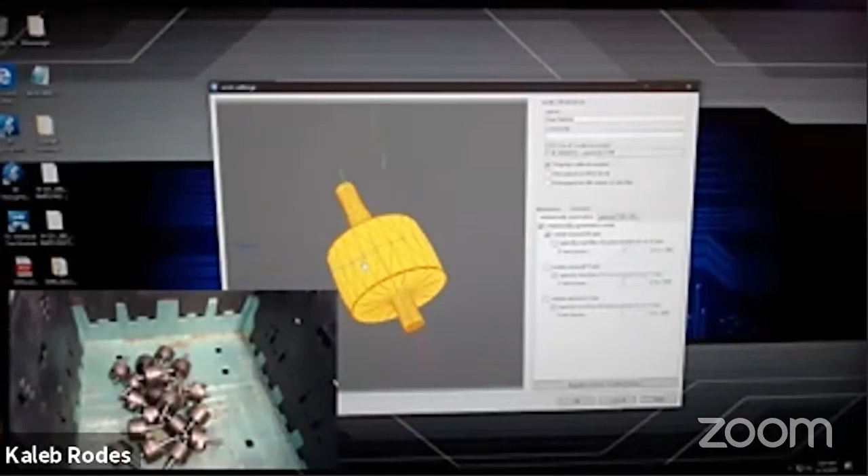The second input then is your part, so CAD of the part. When we do feasibility studies, typically what we ask you is to send us a box of your parts. Between 10 and 30 parts is perfect, along with the CAD model of the part. The CAD model of the part is loaded into the system as a STEP file.

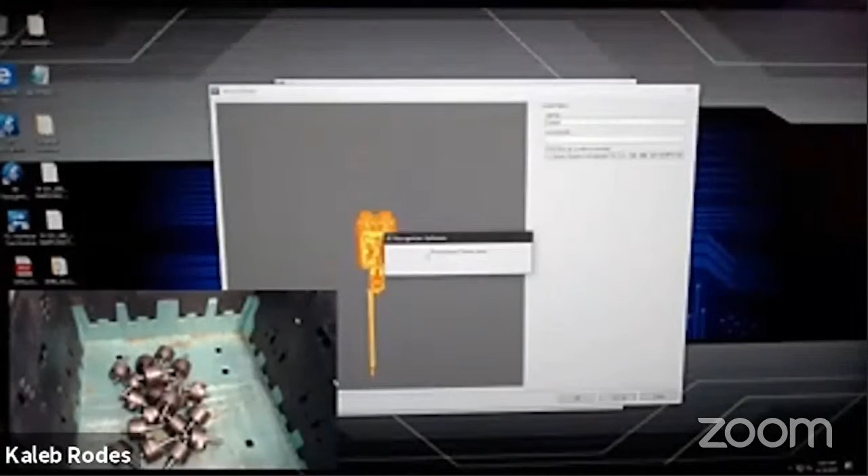The third input is your end of arm tooling, or in other words, your gripper. Here we have a pretty complex gripper, which is actually 2 grippers on 45-degree angles to the tool of the robot. Again, that's loaded in as a STEP file.

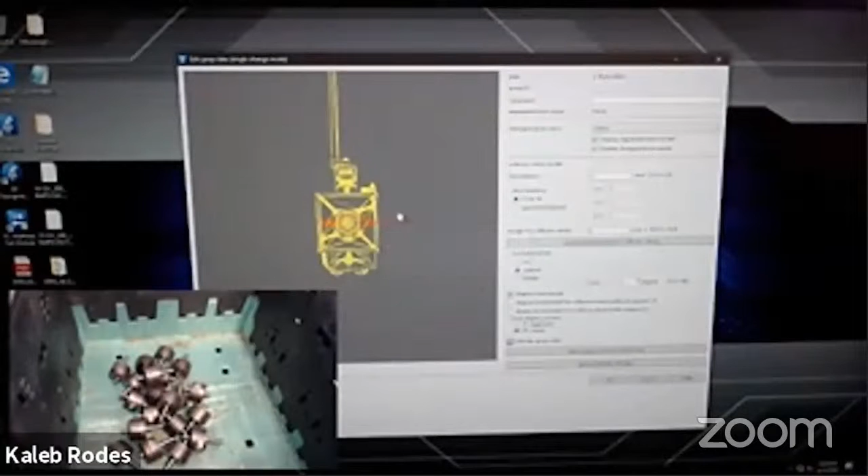And lastly, the last input is your grasp. So teaching your CAD model of your part and how you want to grasp it with the end of arm tooling. And here it is pretty generic. This actual end of arm tooling isn't designed for this part. I would definitely use something different. But for just showing you today, this is how we load in and teach grasp. So those are your 4 inputs into the system.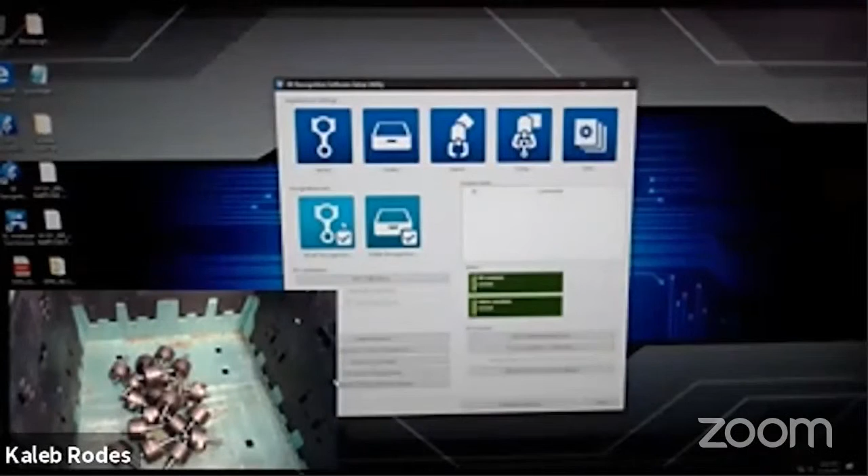When we go into work recognition, it's taking all those CAD model inputs, and the Canon will take an image. It's using structured light to sweep across the bin. When it does that, it creates a point cloud of data, and that data is then CAD matched to the CAD model that you loaded in of the part.

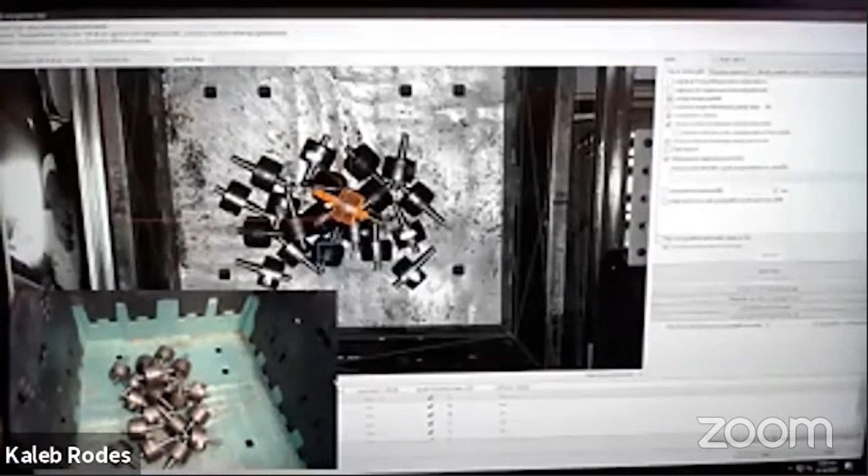The other CAD models, such as bin and end of arm tooling, are specifically used for collision detection. And that collision detection is either with the side of the bin or other parts that may be touching a part or underneath the part that aren't able to be grasped correctly.

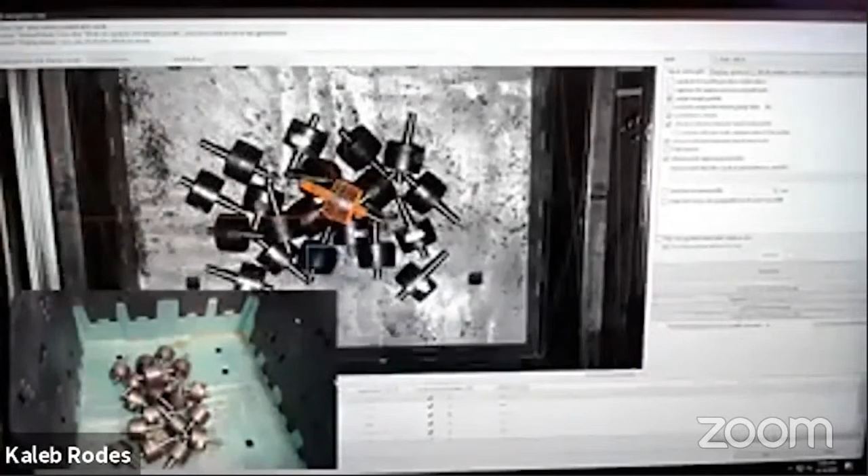So here we are simulating a feasibility test. We don't have a physical robot hooked up. Mike Folster, who started us off today, is acting like the robot. So I am cycling images here on the screen, and Mike is going in and picking out the correct part.

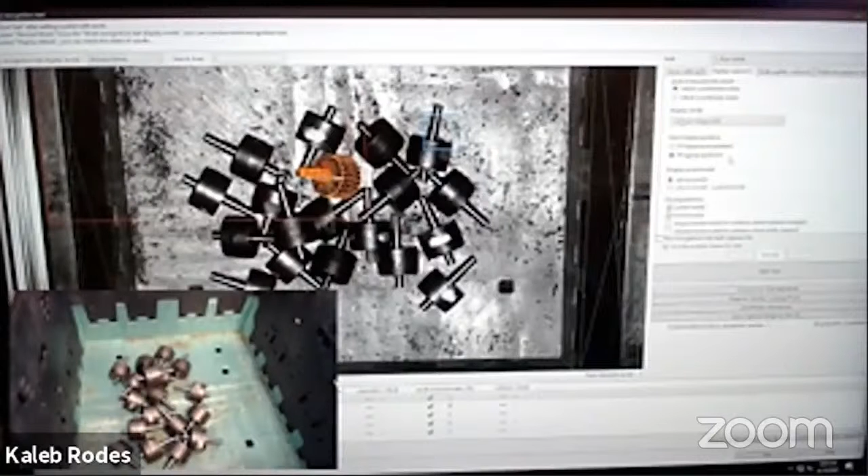If we switch views, right now we're in a 2D image. We can switch to a 3D image, which is a depth image, and you can see the point cloud that the Canon generates. And then you can also see the CAD that's being matched to that point cloud. Hopefully you can see that correctly. If I zoom in a lot, you can get down to every single point. But we'll keep moving through here and have Mike empty the bin for us.

So that's all I really have to add. Actually, no, it's not. There are a couple options to go along with the Canon. Excuse me, there's 4 options. The first one is partial part recognition.

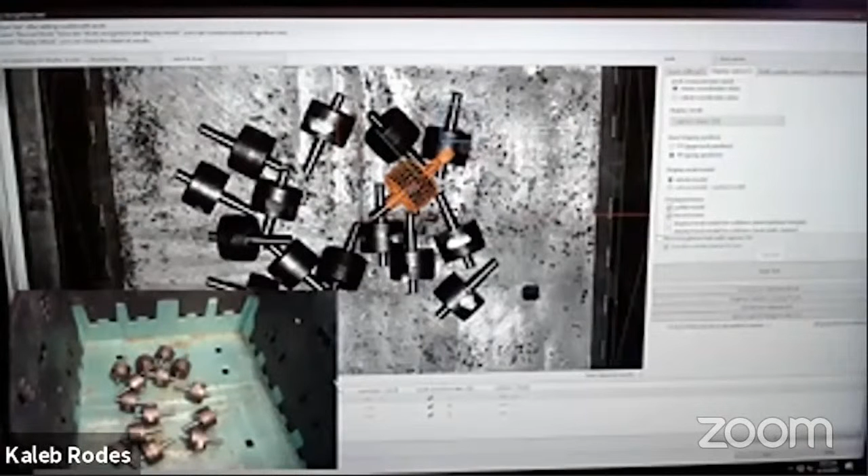What that does essentially is if you have a large part that expands beyond the field of view, we're able to look at just a certain portion of that CAD model, and then extrapolate and do work on the whole part itself. Also, if you have a part with a lot of variance, think of like a bolt with a floating washer, the partial work recognition will allow us to mask certain parts of that CAD out of the system, so we can get rid of that variance and just look at the head of the bolt if that's what we want to pick.

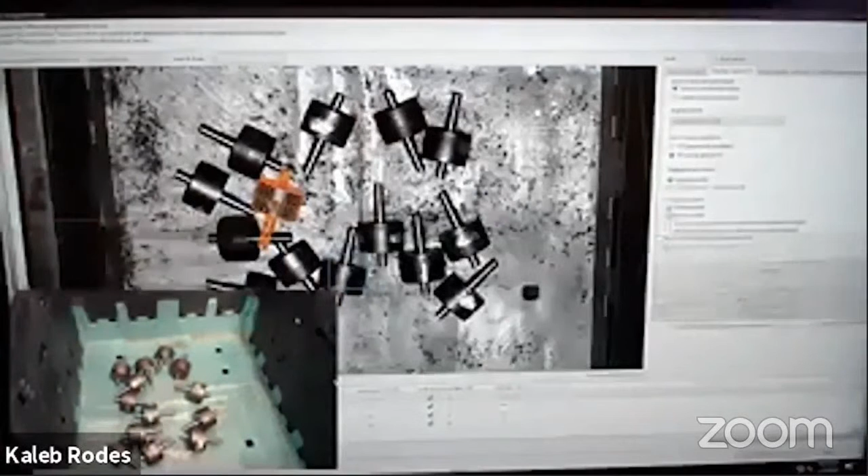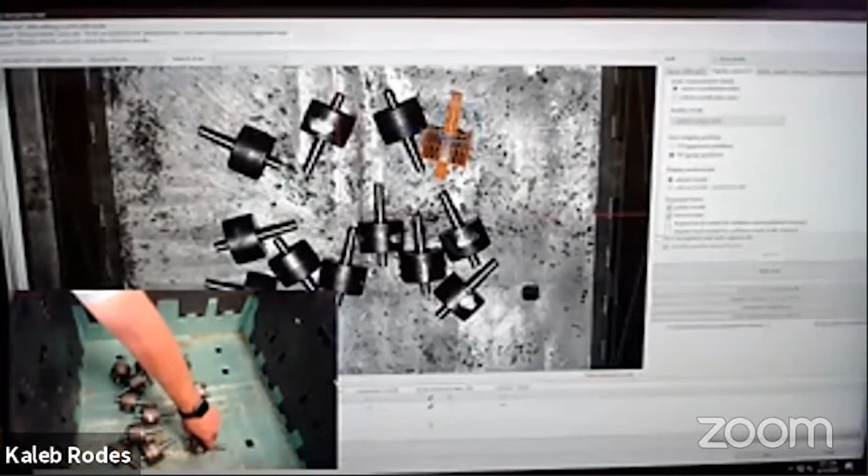The other options: consecutive recognition is the most popular option that we typically sell in a solution. That really accelerates the cycle time of the application. So basically, with consecutive recognition, we're taking a scan, taking out the part, and then consecutive recognition is taking a 2D image of the bin and seeing if any of the parts have moved. If none of the parts have moved, then we know that we have good points on the other parts, and we're able to go in and pick precisely on those parts. So again, if you have demanding cycle times in your application, that would be an option you'd want to use.

Third is batch recognition or multiple bin. This allows you to handle multiple bins in the process. So under one field of view, you could have 2, 3, 4 different bins with different parts. And then with one scan, you can pick up a part in each bin. So you could essentially pick 4 parts from 4 different bins with one scan of recognition timing.

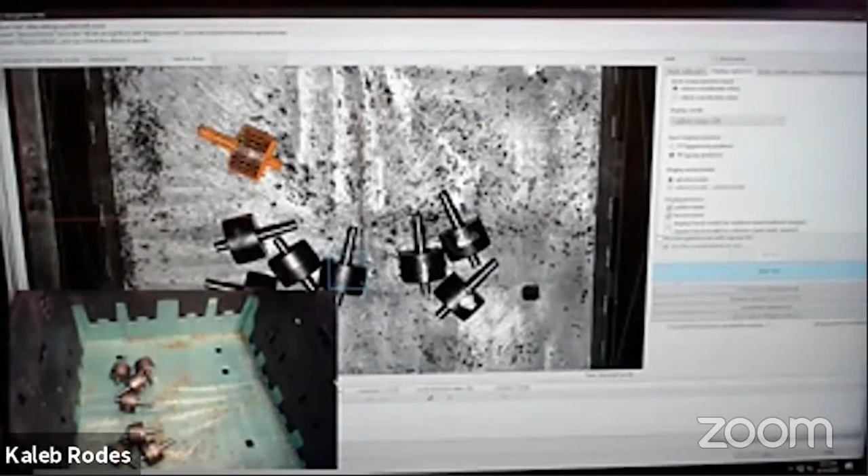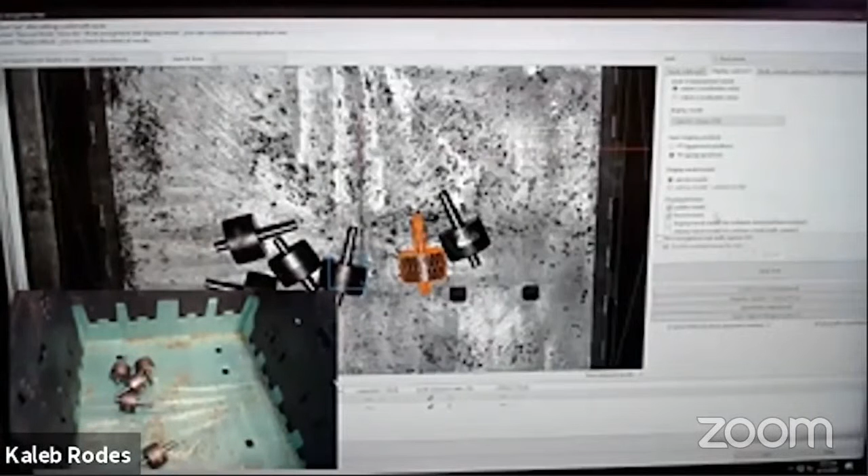Last is the slider mount option. This allows you to mount the 3D vision head to a slider or to a linear axis of motion, whether that's horizontal or vertical. Basically what it does is, for example, say you have 2 bins, and the first bin is empty. You want to slide over to that new bin of parts and start picking from the full bin of parts. Also, if you want to get deeper down into the corners, so if you have a very tall bin, you could put it on a vertical axis. So basically what it allows you to do is take measurements from 2 different locations, essentially.

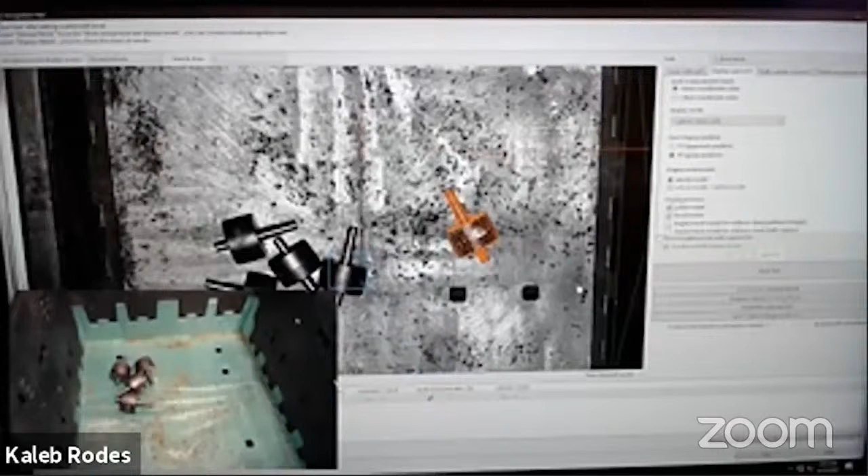You've been able to see here a number of technologies that are really on the doorstep of what Industry 4.0 is all about, whether it's the digital representation of product in a bin that can communicate to a robot, or machine learning based on the AI neural networking technologies from Cognex or from Micropsi. We're seeing now that emergence to simplify application deployment or expand the collaborative domain by taking robots to places where they would be challenged to work otherwise. So if we did a good job for you today, then hopefully you feel more comfortable about the safety domain in terms of what's required.